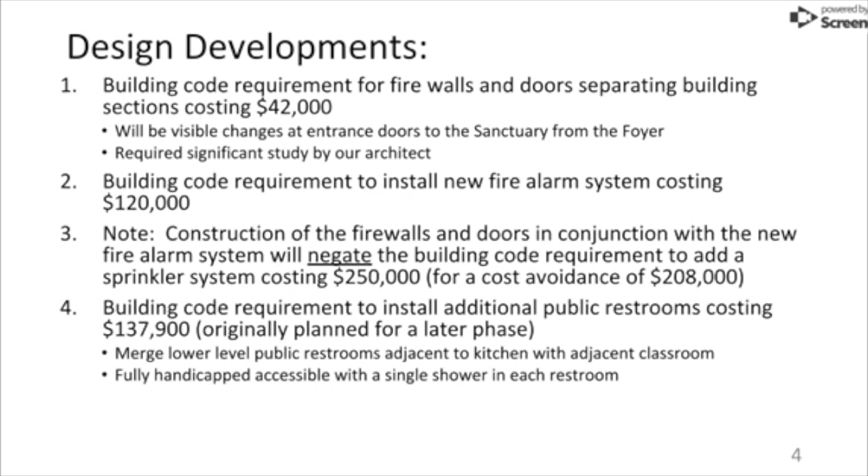The other was that if we add any space to the building, we now have to add additional public restroom space, additional fixtures. And you'll see later in the report that the building committee is now recommending that be completed within phase 1, with other elements in phase 2 and 3.

On slide 5, we discovered that the roof design over what would have been an expanded foyer and office area now provides the opportunity for 2 large classrooms on the second floor and a 3rd classroom on the lower level down by Noah's Ark Lane.

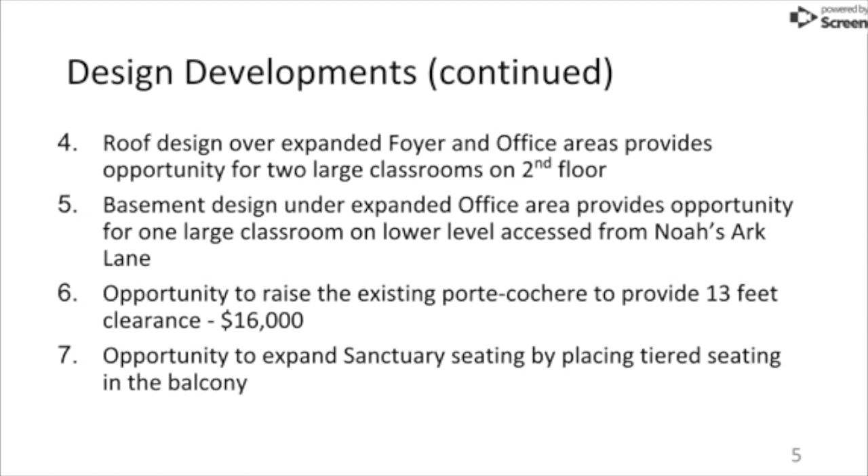If we're going to do this work on the front to the foyer, it also makes sense to lift up or raise the existing porte cochere or drive-under canopy so we get clearance under there for buses and larger vehicles, which we don't currently have. And the other opportunity is that we look to expand sanctuary seating by hopefully placing some seating in the balcony.

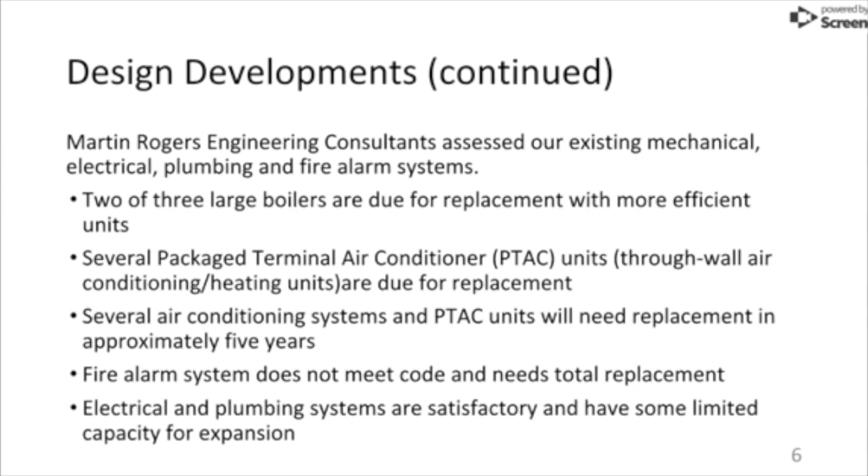On slide 6, this summarized the review of the building infrastructure by our engineering consultants, Martin and Rogers. The significant items there were that 2 of our boilers really are in need of replacement. Some of our PTAC units, or these through-the-wall air conditioning units, are due for replacement, and other items will be up for replacement within 5 years. Our fire alarm system does not meet code and needs to be replaced, but our electrical and plumbing systems are in good shape.

Slide 7 talks about expanding the sanctuary seating. This was one of the things we really wanted to do within this project. Before, we had looked at expanding the current sanctuary. Constructing a brand new sanctuary was cost prohibitive at a cost of $5 million, or in excess of $5 million.

We tried adding a Saturday evening service, but that didn't provide any significant relief to our 10:30 a.m. service capacity issues. However, since that time, we've added audio and visual capability to the Springer Chapel, renamed it the Wiggle Room, so that people can go there and participate in the service, and we see that growing.

Also, we're now live streaming both worship services on the radio and internet, which makes it possible for people to hear and see from home.

The pastoral staff and deacons are beginning to consider adding maybe a third service on Sunday morning, but that is not being recommended at this time. It's just something they're studying.

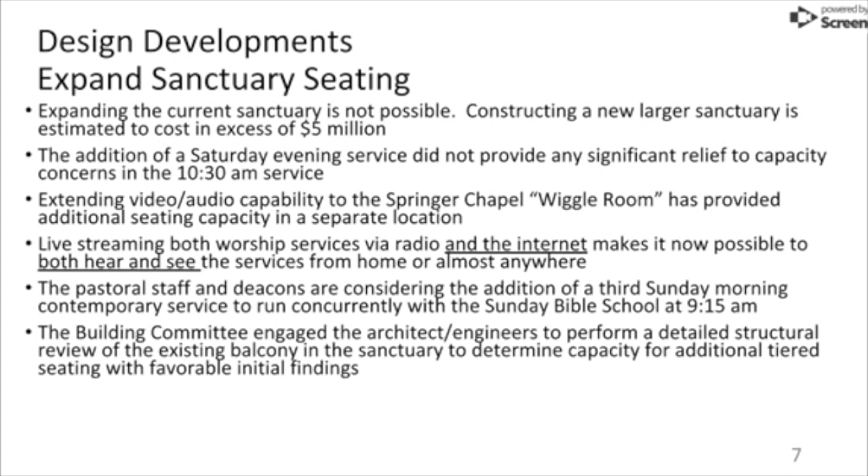The other thing that's still under review is exactly how much can we expand seating within the existing balcony, and we're waiting for additional structural answers to make that happen.

So, on slide 8, we refer to the fact that we're now going into a 3-phase project, with the first phase being accomplished with available funds. We don't want to take out a mortgage.

We're recommending that the public restrooms be included in the first phase, but that the foyer or narthex or vestibule, whatever you want to call it, and the office addition be moved to a phase 2 project. And then the 2 big pieces yet to remain after that, the lower level welcome center and expansion of the youth center on that lower level, would become a phase 3 project.

We had looked at changes to our existing nurseries within the projects, but we bumped that to the trustees, and they're looking at some minor internal changes with an overall expansion now planned for phase 3.

So phase 1 now includes these elements as shown on slide 9. A storage building or pole building would be built out on the property closer to Route 642, allowing us to empty out the current garages. We would then renovate the current garage space for a youth center or youth programs.

We would expand the public restrooms adjacent to the kitchen on the lower level, near the Beveridge Family Life Center. Hopefully we'll add seating in the balcony to expand our seating capacity. Also in phase 1 would be the installation of a walk-in refrigerator or freezer attached to the kitchen, and we would upgrade the heating and ventilating systems in the Beveridge Family Life Center.

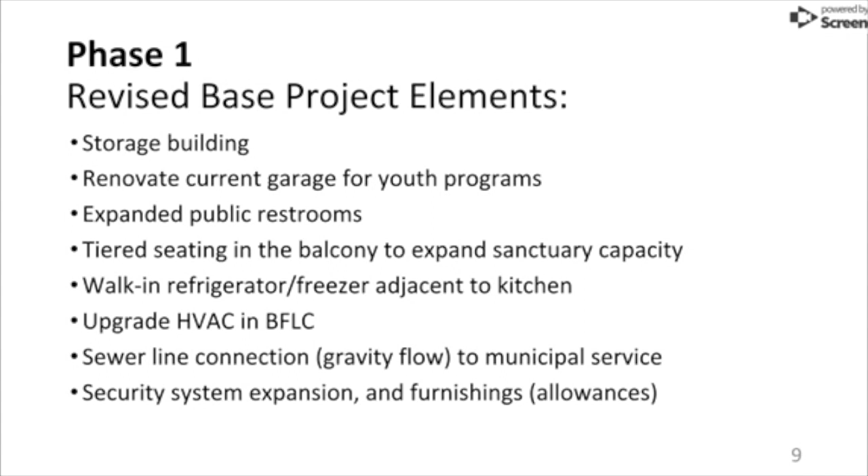We would abandon our current sand mound or on-site septic system in favor of connecting to the municipal system along Route 642, and we would expand our security system as needed, including the camera system, and provide furnishings for phase 1. So here are some pieces of phase 1.

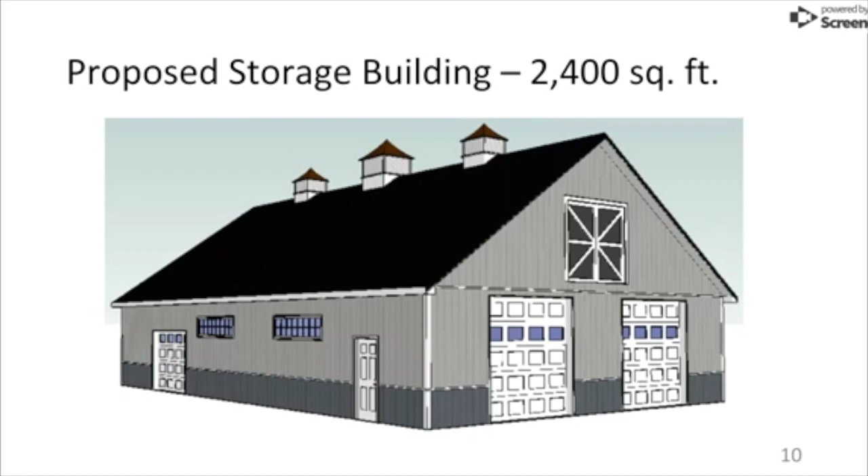The storage building is 2,400 square feet, about double the size of our current garages.

The current garage is shown on slide 11, outlined in this darker area which I'm tracing with the mouse. Just to the left is the current Beveridge Family Life Center, and back here is a current classroom, so this is existing space. The current garage doors are along the lower level here, and you can see they would be replaced with doors. This really just converts the use of that space; it doesn't add much in terms of walls or furnishings, though it does carve out a space at the back corner for some electrical gear.

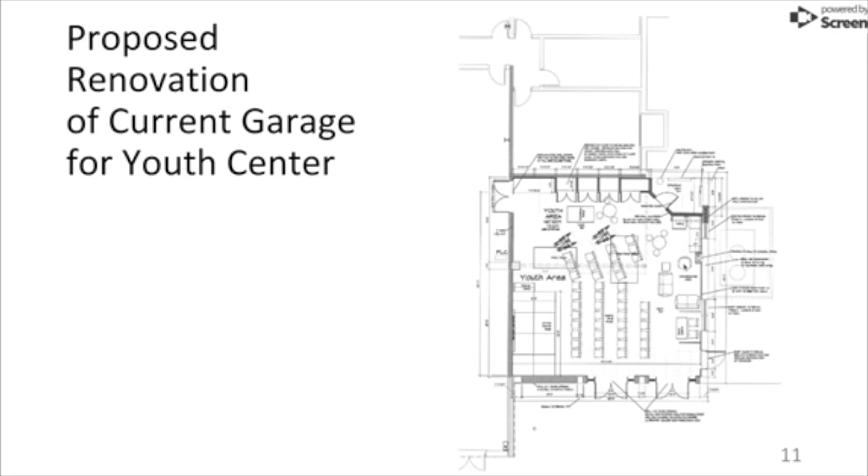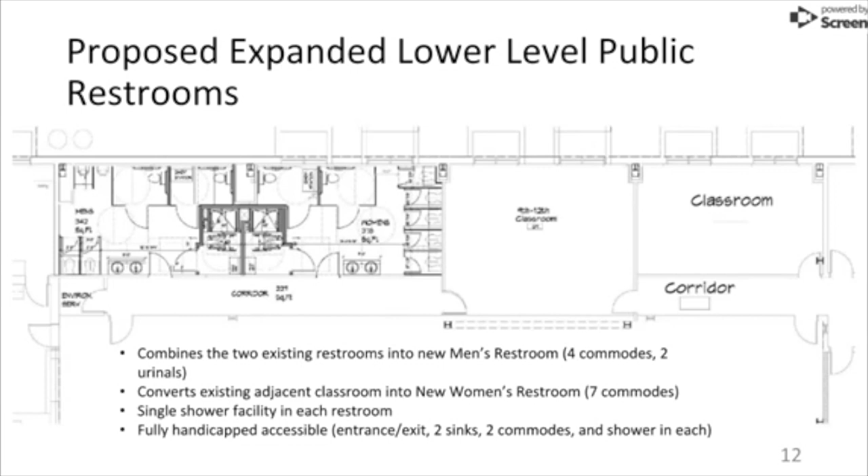There's also a single shower in each of these restrooms, which would be handicapped accessible. In fact, these restrooms would be fully handicapped accessible with 2 sinks, 2 commodes in each one, and a shower in each.

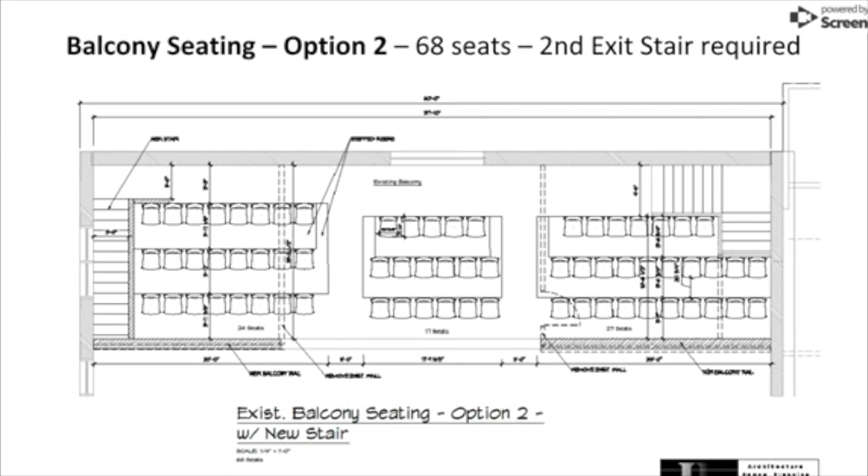There are a couple of options for balcony seating. Option 1 leaves the sound room in place but removes the mother's nursing room up in the balcony, showing an expansion of about 49 seats. Another option we're looking at would remove both the sound room and the nursing mother's room and add another stairwell to the side, showing 68 seats. Neither option has been fully vetted or is being recommended as a solution at this point.

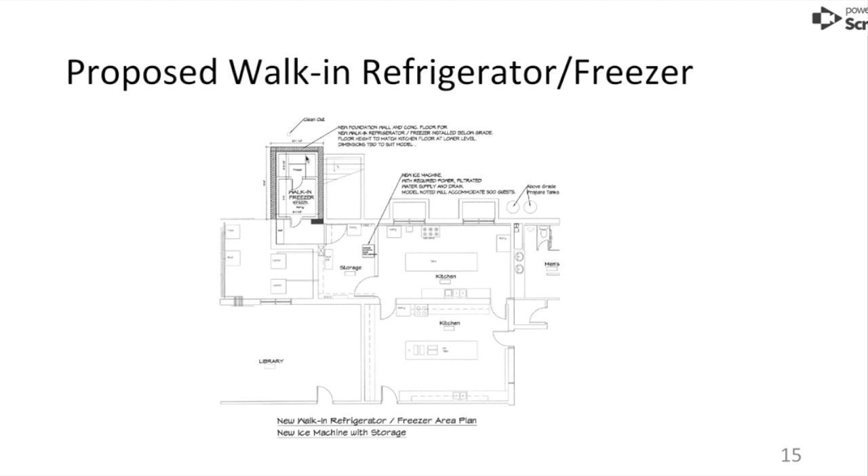Slide 15 is a pictorial representation of the expanded walk-in refrigerator and freezer space adjacent to the current kitchen. The kitchens are here, here's the current library, this is the storage room, and there's an outside stair in this area which would be converted to a hallway. Then a new concrete wall would be built at that lower level to accommodate the new walk-in freezer and refrigerator.

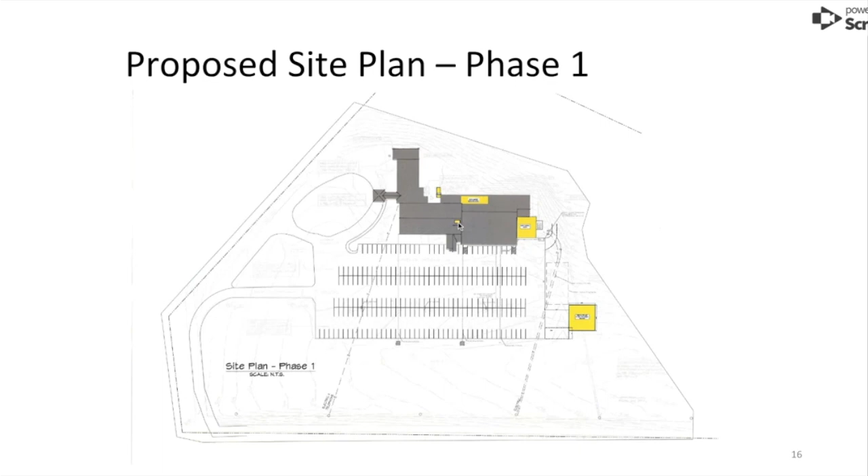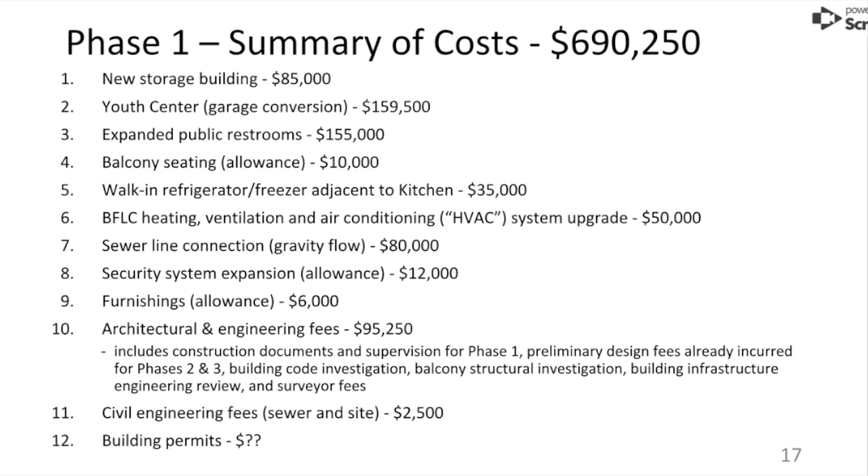So that's the total for Phase 1. The church has approved spending these dollars for Phase 1, proceeding with construction and renovation, and moving ahead with the project. About $600,000 was allocated from existing funds in the building and memorial funds and the general fund, leaving about $90,000 yet to be raised, which we anticipate coming in over the next several months as Phase 1 is accomplished. Those 17 slides finish the summary of Phase 1.